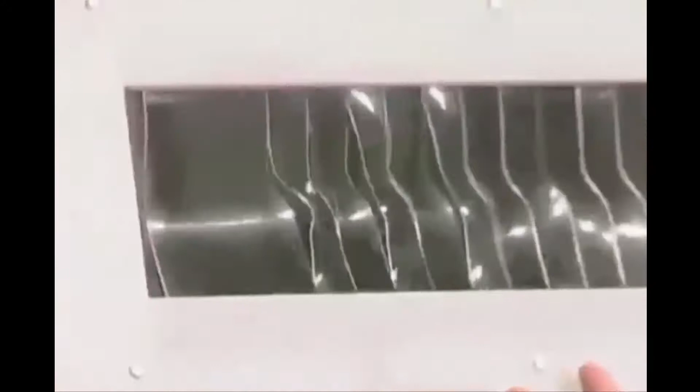We've created things like this, a glass that breathes in response to people, combining sensors and information. This is a project called Living City, commissioned by the Van Alen Institute and the Eyebeam Center for Art and Technology. We've created a facade that glows and blinks in response to things like air quality and human interest in the environment. Here we're combining environment with public space, and this is a project called Living Light in Seoul, South Korea, commissioned by the city of Seoul.

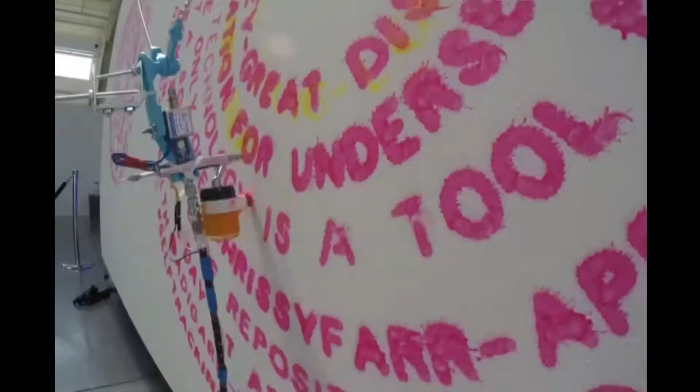We've also created a project that's a wall that displays real-time social media graffiti. Here we're combining robotics with public debate. In other words, robotics that are not just top-down automation, but robotics that have feedback systems. This is a project called Social Robot in San Francisco for an installation of the Quantified Self group. And we've even created this project here, soup bowls that reveal secret messages in street food, combining street culture and critical discourse. So this is a project called Street Life in Shenzhen, China.

More recently, we've been designing with living systems, with actual living systems, combining the digital with the biological. And this is an example where we've created an air filtering building facade with the self-sustaining ecosystem of marine plants and animals. So here we're combining building systems and aesthetics or atmosphere. This is a project called Amphibious Envelope. It's in Chicago right now as part of the current Chicago Architecture Biennial.

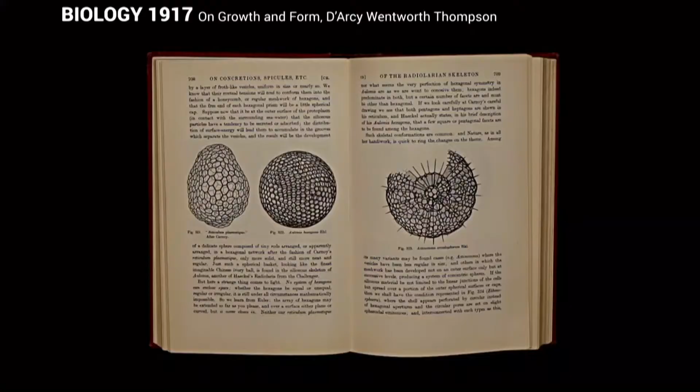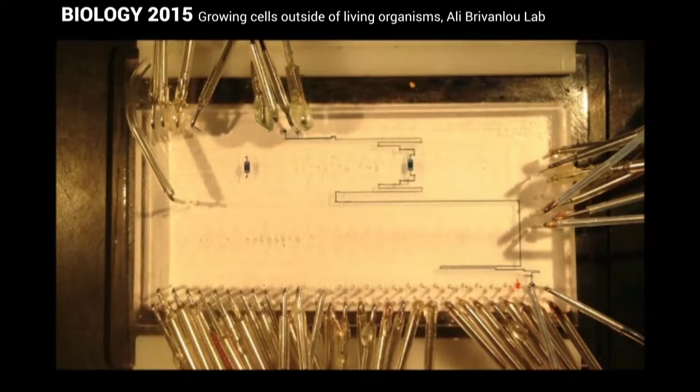In a more general sense, we've been creating projects recently that are really, I think, at the intersection of architecture, biology, and computation, combining all of them, thinking of these loops as interrelated and connected. But of course, it's important for me to note, as Oron Catts described in a slightly different way, that architects and designers have been fascinated by biology for many years. Here's a book that was written about 100 years ago that continues to be an inspiration for architects. But I'd like to say that biology of today is very different than 100 years ago.

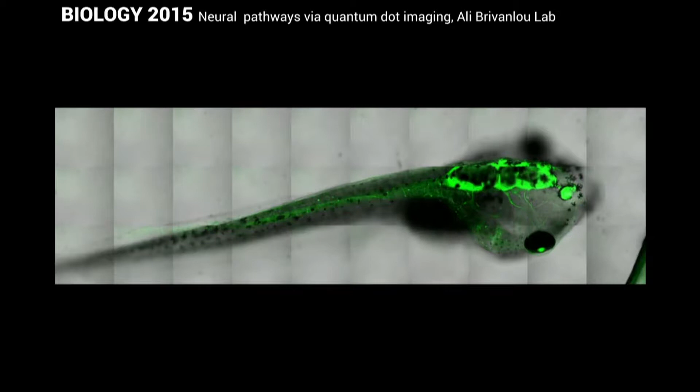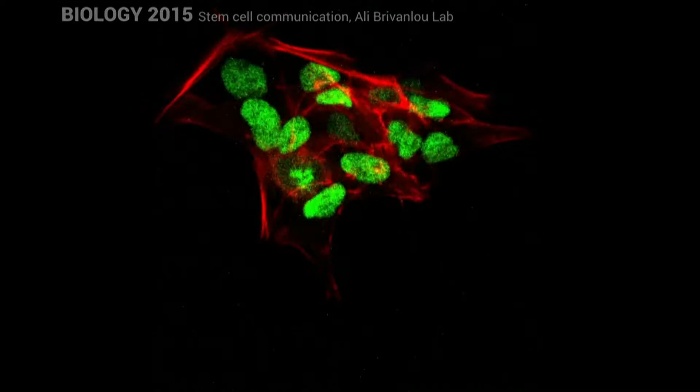It's now possible to do things like this. We can grow cells in glass chips outside of a living organism. We can do things like this through quantum dots, show the neurons firing in real time in a living tadpole. We can monitor the molecular signaling between individual stem cells in an organism that's growing and developing, and these molecular signals tell each cell whether to grow into tissue of bone or heart or muscle.

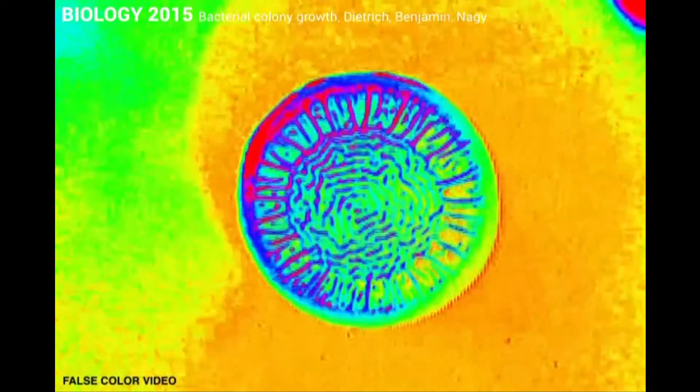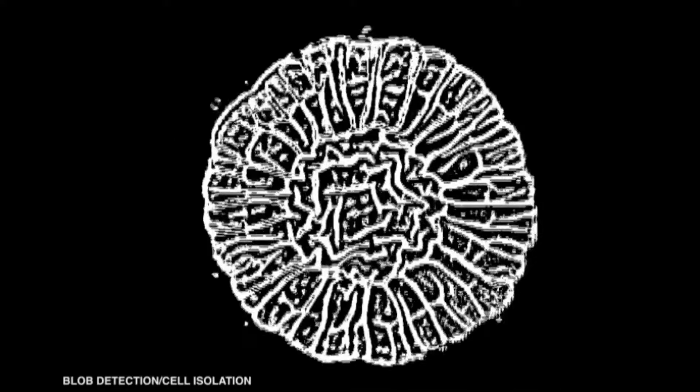And we're able to do things like this: take biology, the growth of bacteria on a petri dish about this size, and then start applying some current techniques of computation to it. So we can use computer vision, we can use machine learning to try to understand and interpret what's happening in this very complex ecosystem, or this complex metabolism of biological growth. And once we can put that complex biological growth into the computer, then it becomes very interesting to me as a potential design ingredient.

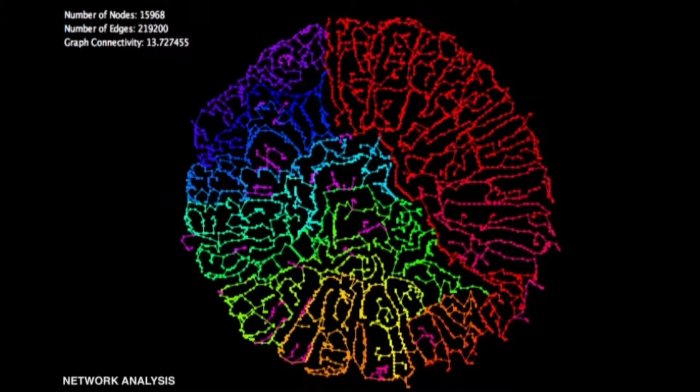In other words, I think this new version of biology right now, different than 100 years ago, offers several new possibilities. And what I'd like to do is describe 3 of those possibilities that we have been working with in our studio. Number 1, biocomputation.

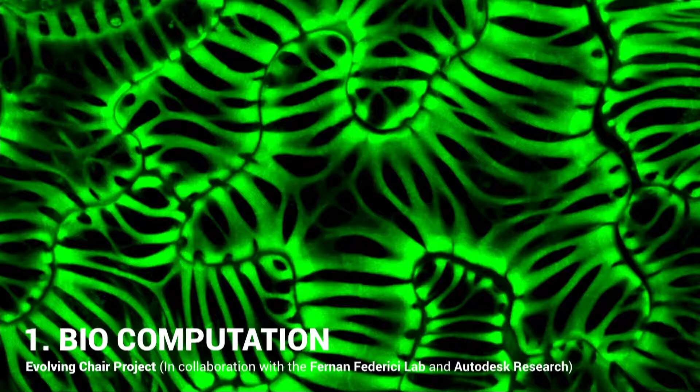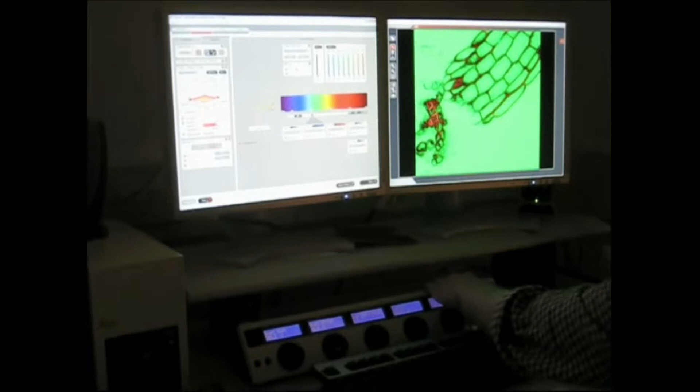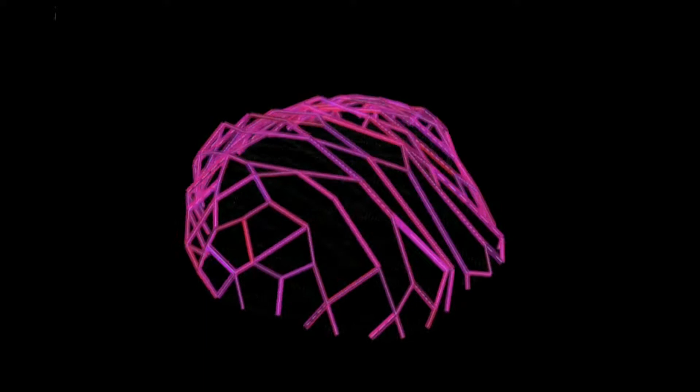This basically means collaborating with living organisms to compute solutions and explore designs beyond what is possible for a human alone to create. And in this project, we started with taking microscope photos and videos of xylem cells in the stems of plants and converting those videos and photos into 3D digital models of the growth of xylem cells so that they're in this kind of design environment.

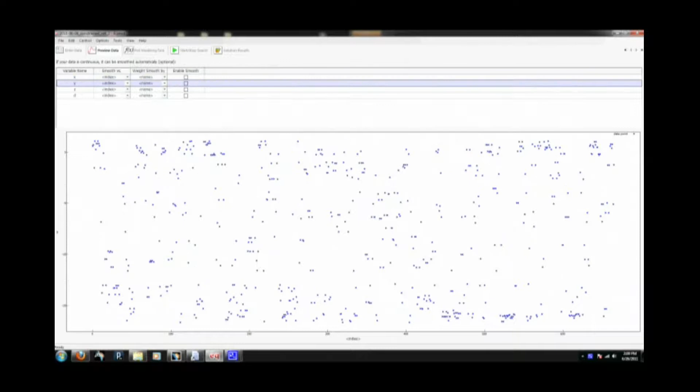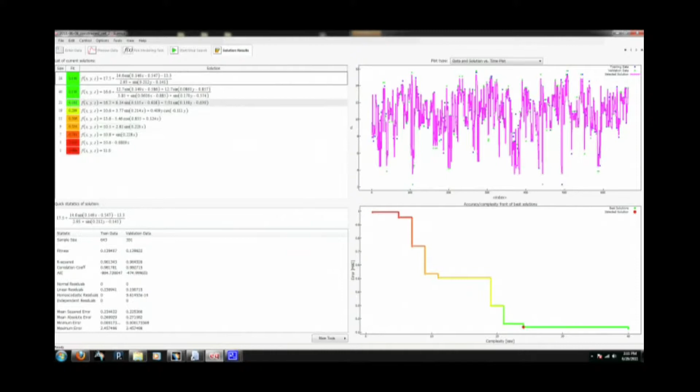And then we take a bunch of different xylem cells that create these exoskeleton shapes, and we start trying to derive data from them. So here we're measuring the length and angle of each bar in the xylem cell, feeding it into a spreadsheet, then using a kind of version of artificial intelligence, this great computer system created at Cornell University, to derive an equation from a very complex data set. So you can take almost any spreadsheet, feed it into the computer, and the computer over time will try to evolve equations that describe the data.

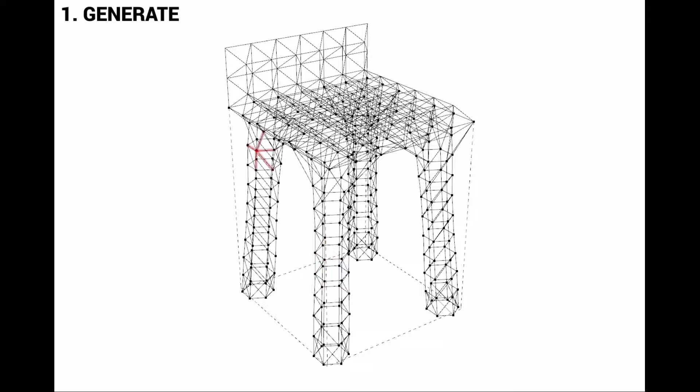But what if we could have a new approach to design where we sketched out some things, like the seat of a chair, that we knew precisely we wanted. But then we sketched out other parts of the chair, for example, the supports of a chair, that we wanted to explore and learn something new about and use a new design method for. And that was the basis for our thinking about this project, where we took the xylem cell algorithm, the biological program for how xylem cells grow, and we applied it to try to discover something new about how the support of a chair might look.

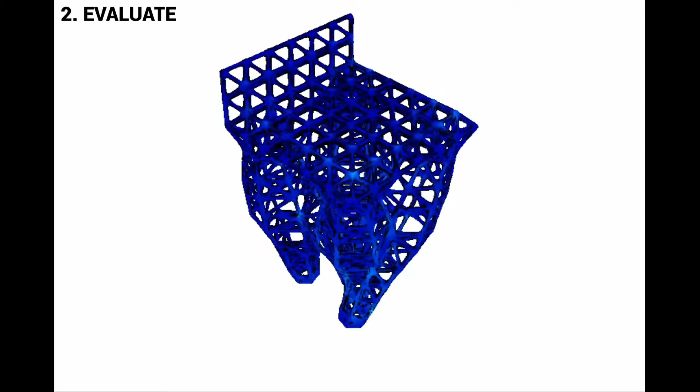So the details are not so important, but we basically populate a series of points, connect these points into a lattice, and we basically have an environment in the computer where we can design or generate many versions of a chair and then simulate their performance, for example, structural performance of a chair, and explore thousands of possible designs. Use the computer to do what it's good at, repeating tasks over and over again, and create this data set where each point represents a potential chair, and allow a human to do what they're good at, which is to interpret results, apply judgment, negotiate trade-offs between competing objectives.

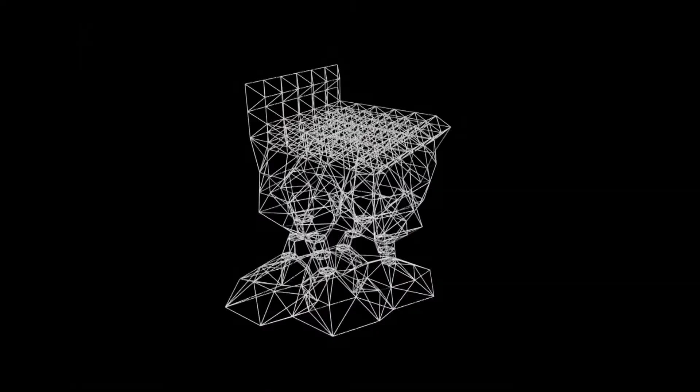And at the end of the day, we think this is a promising approach for using biocomputation to create new kinds of objects in the physical world that would not necessarily occur to us, that would not be possible to design with other methods, with previous methods.

Number 2, biosensing. So for us, this basically means using living biological organisms to detect information about the environment and then respond accordingly. This is a project that we created and that we're building right now for the city of New York. And it starts with the idea that we could create a public interface, a real-time interface to environmental quality in a very urban space right in downtown Manhattan.

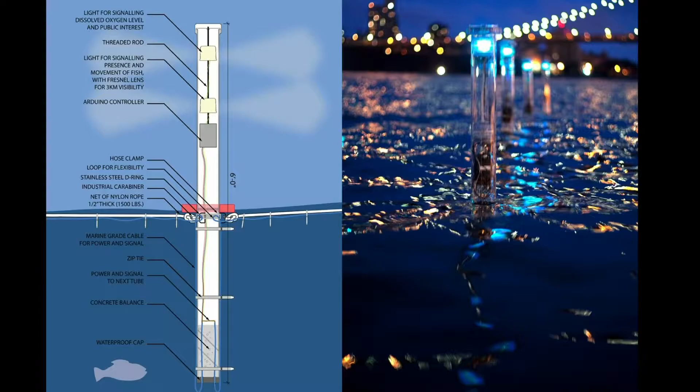And we have been using, for several years in the early prototypes, some digital technologies. You know, these kinds of physical sensors and microcontrollers that are making up what we talk about when we say the Internet of Things. And we're using this kind of technology in our public installation, but we've also started using biological sensors. And what I mean by that is that we're using mussels, living mussels, the shellfish.

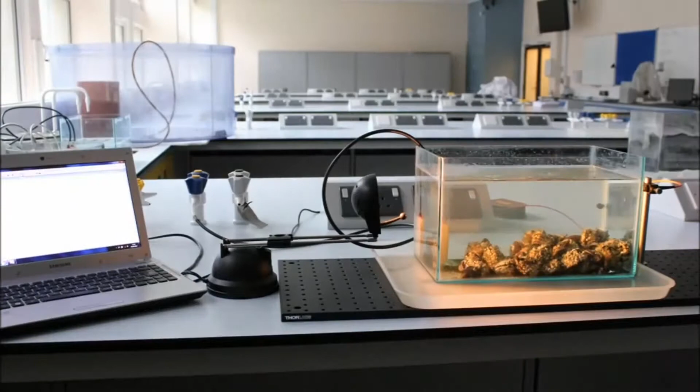And here you see how mussels, when they live, they open and close their shells as part of their process of living. So this is a sped up video, and you can see the pulsing and the moving of the mussels in this tank as they're living. Well, it turns out that the rate and the amount that mussels open and close their shells is a very sensitive and sophisticated detector of pollution in the water.

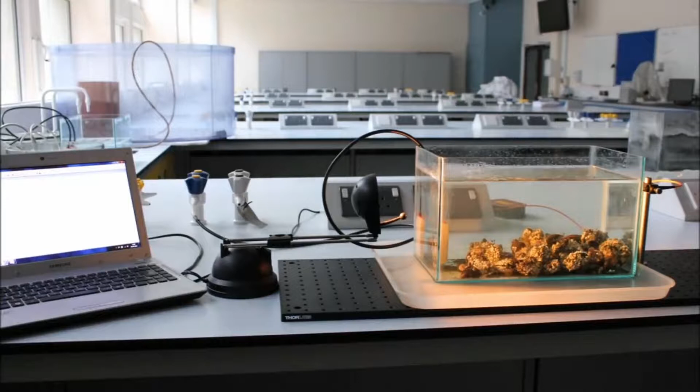In fact, when mussels open and close their shells, they tell us more about water quality than our most expensive and most sophisticated single-purpose digital sensors. They're a better sensor of water quality than a $10,000 dissolved oxygen sensor.

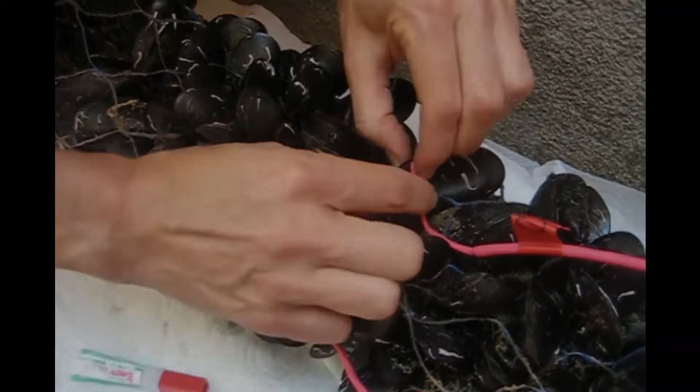And so the project that we have been doing involves taking living mussels, gluing to one side of a mussel's shell a $2 Hall effect sensor, gluing to the other side of the shell an inexpensive magnet, and then figuring out that we can harness the natural ability of these mussels to detect water quality and put that into a kind of ecosystem of design. Use that biological sensing as part of our design palette, the way we used other digital technologies or fixed inert materials.

And we think this is an interesting approach because you could say that it combines artificial intelligence with biological intelligence or natural intelligence. You know, so artificial intelligence is kind of the best computers have to offer, the holy grail of computing. But maybe we could get more out of it by combining it with a version of biological intelligence. What mussels, living mussels, have evolved to do over millions of years, detect a huge variety of chemicals and molecules in their environment and react through a combination of factors.

What we're thinking is that wouldn't this be an even better solution than either one alone? So artificial intelligence has great things to offer designers. Natural intelligence has great things to offer. And if you can combine them, that represents what we think is an explosion of new possibilities for future cities and buildings.

This project, of course, is not just about an exploration of technology, but it's out in the city. And here is a version of a prototype that we created showing how our dynamic lights, which change color to indicate relative water quality, how those lights look in the context of the skylines of our cities. So this is displaying light as information to the public as a real-time detector of water quality.

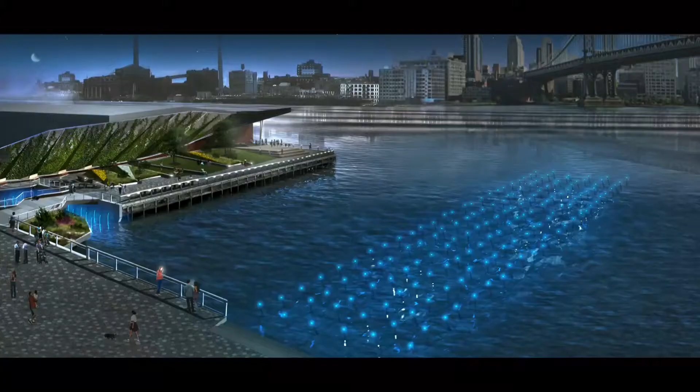And we're using this technology not just as a kind of science experiment, not just as a design experiment, but in the context of noting and designing a new kind of public space in the city. So this is a rendering of what our project will look like after it completes construction in the summer of 2016. It's a 200-foot-long floating pier of these interactive lights that will tell the public things about their environment through this combination of digital sensors and biological sensors. This is in Manhattan in the East River, right in downtown New York City.

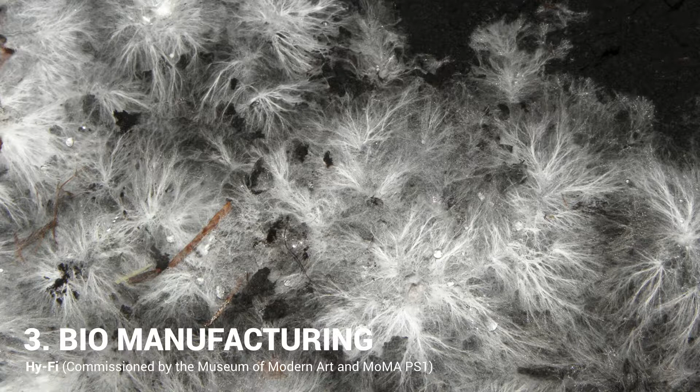And number 3, and this is my last category here, this is called biomanufacturing. And that basically is what we're defining as collaborating with living organisms as tiny factories to produce the physical stuff of the built environment, to produce building blocks or even whole physical systems for new kinds of buildings and cities.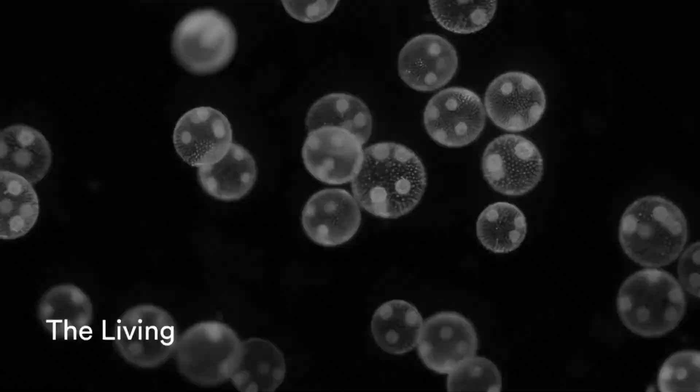This project was something we created for the Museum of Modern Art and MoMA PS1 in New York City. And it's a project that began with a competition. So this is our competition video that described the idea we had for biomanufacturing.

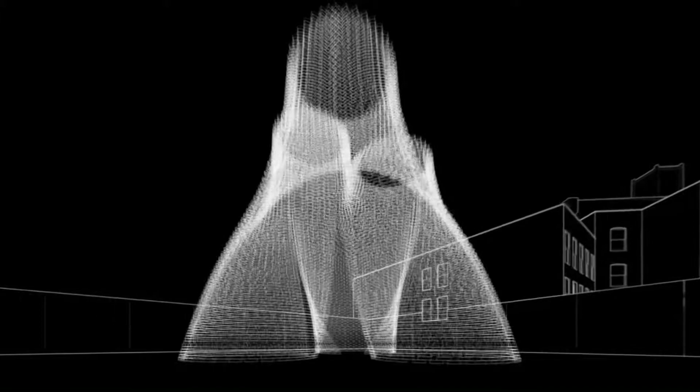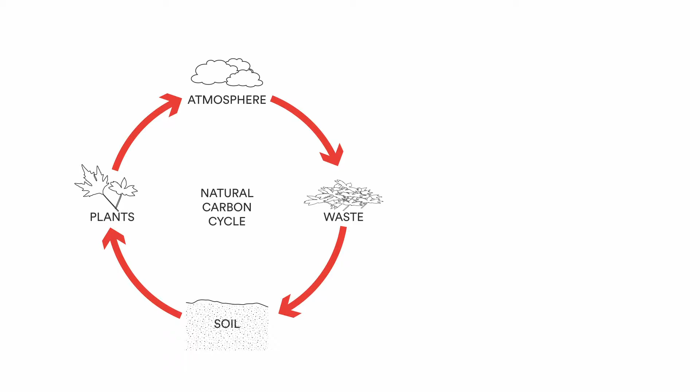So this project is called Hy-Fi, and it was basically an experiment in whether we could manufacture a new kind of building block through a new kind of metabolism. So we started with a loop of our own. I think maybe everyone will have loops in this session to show some of their ideas about metabolism.

And the loop we're showing here is the carbon cycle, the Earth's normal, natural, healthy cycle of growth and decay and regrowth. And the idea that we had for this project was that maybe we could make our buildings and our cities by temporarily borrowing material and energy from the healthy carbon cycle and then returning it back to the carbon cycle.

In other words, we were interested in thinking that maybe we could take low-value raw materials, the waste shown in the diagram, rather than high-value raw materials, spend almost no energy converting the raw materials into building blocks instead of spending a huge amount of energy to create building blocks as we do with most buildings.

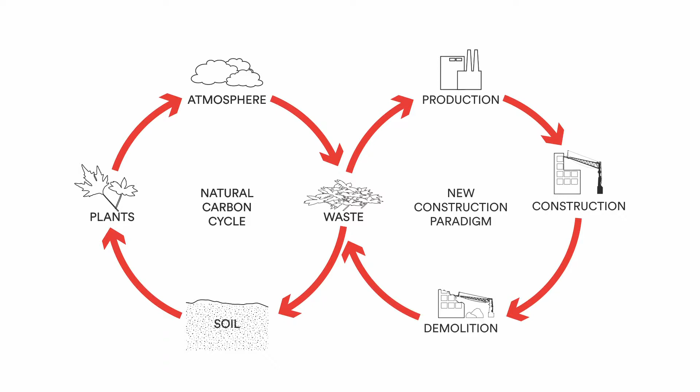Then create some kind of building, and at the end of the useful life of that building, taking all of that physical stuff and returning it back to the carbon cycle instead of leaving that physical stuff in a landfill for 100 or even 1,000 years. So how could we possibly do this? Well, of course, through a living organism.

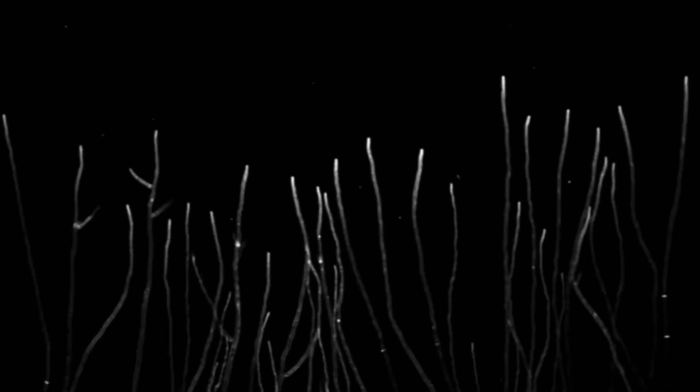This is the growth of mycelium, which is the root-like structure of mushrooms. So it grows in thin white filaments that branch in a kind of complex biological algorithm of their own. All of the nutrients that flow through these organisms are part of its growth, but also of the kind of composting of the floor of the forest where these organisms grow.

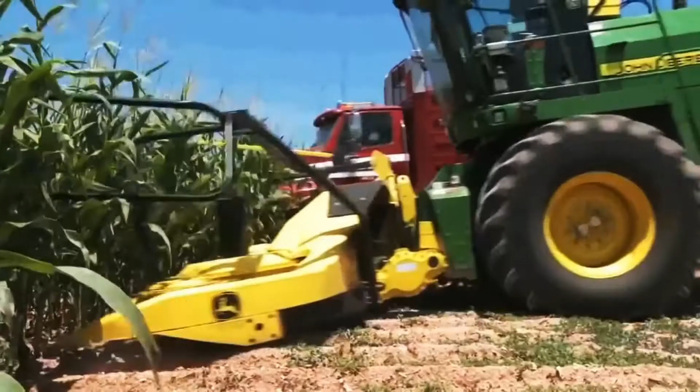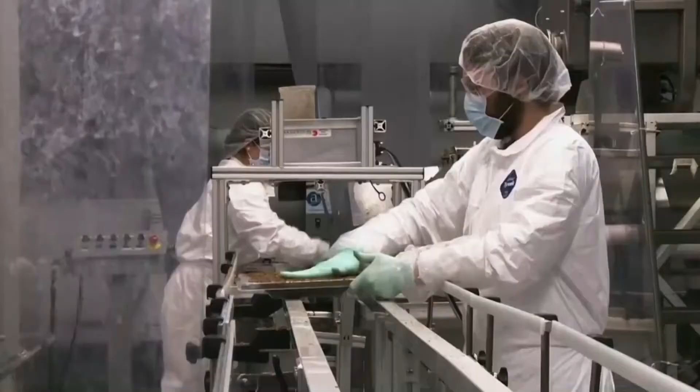And we were interested in taking this organism, mycelium, and using it to create building blocks, because it turns out that you can combine mycelium with agricultural waste, so not the high-value part of agriculture, not corn kernels, but the low-value part, the chopped-up corn stalks. You can combine those two in a mold of almost any shape, and here you see in about 5 days it will grow into a solid object.

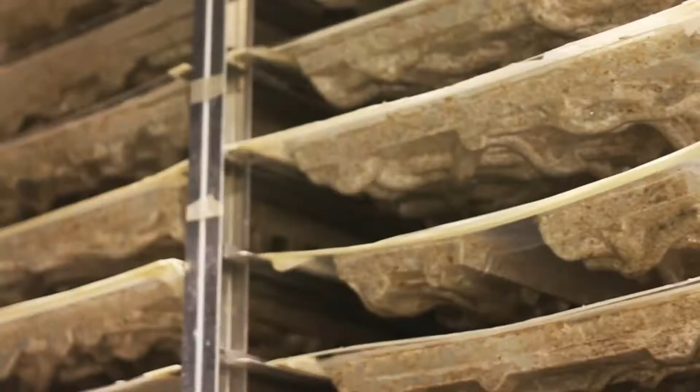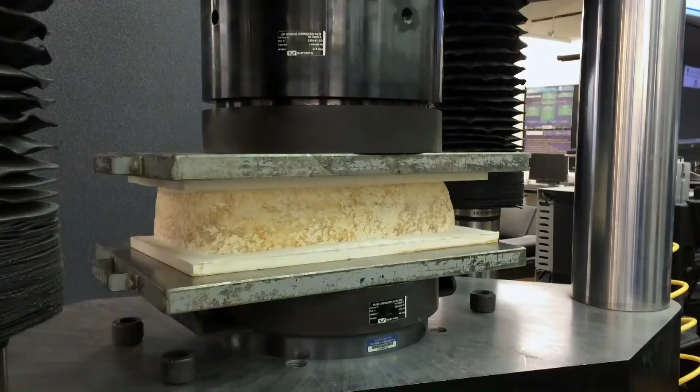So you're able to create useful physical objects out of waste plus a living, growing organism. And our idea was to create a new kind of brick, a new kind of architectural building block through this process. Here's the brick that we designed and that we ended up using for the project. But it's not quite as easy as just describing the idea and making sure that it works for one brick. And because no one had ever built a large-scale outdoor architecture out of this material, we had to do a huge amount of testing.

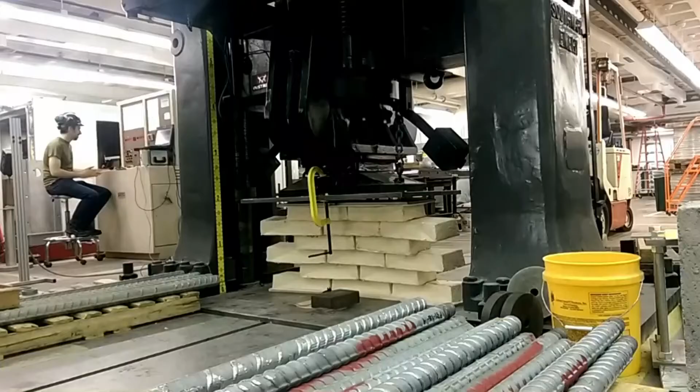So here we are taking one of these bricks, crushing it through a universal testing machine in a laboratory at Columbia University, and also testing an assembly of bricks in this testing machine in order to get information about this new kind of material. In other words, when we took a new idea and a new approach to metabolism out into the world, we had to do a huge amount of testing.

And that wasn't just to learn about the material, but because if we wanted to create a large-scale installation out of this material, we had to, of course, do some structural analysis. And our structural engineers at Arup, the global engineering firm, said the first thing we need to do is calculate how this will perform. But of course, in most structural engineering software, there's not a drop-down menu item for mushroom brick. So we had to derive the data and then input the data about how to calculate the performance of our structure.

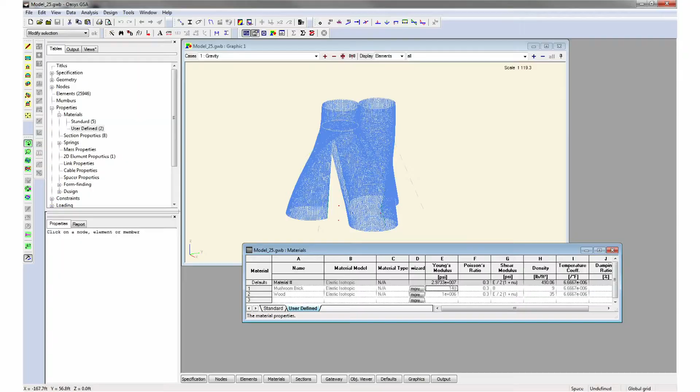Another challenge we had was that this material is different on the outside than the inside. In other words, if you cut these bricks, the inside is a little bit more porous. And this created an interesting challenge for us because unlike a traditional brick, which you could cut on site in order to make a complex form, we were not able to cut our bricks. That would have compromised their structural performance.

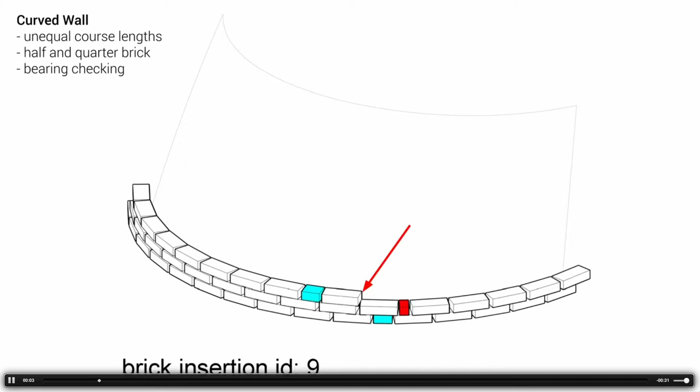So here we had to engage computation to solve two problems that are easy to describe but hard to solve. One is a fitting problem. So if each course of bricks, each line of bricks, is a different length, then you have to figure out how you can fit each course of bricks in a row.

And also, we had a stacking problem because you have to make sure that each brick always sits on top of two other bricks and is connected to make a system. And the fitting problem and the stacking problem is something that was impossible to design and understand by hand. We had to use a computer to do it.

We wrote a few different algorithms. The writing of the algorithms was iterative. The first one didn't work, but we kept working on it. And here we were applying computation not as the driving force of a design, but to solve a very specific problem in the design process.

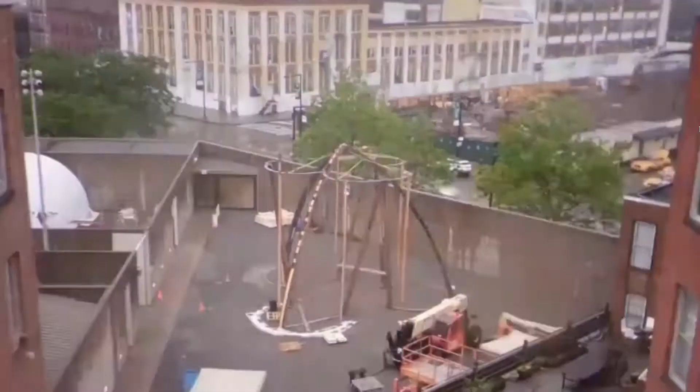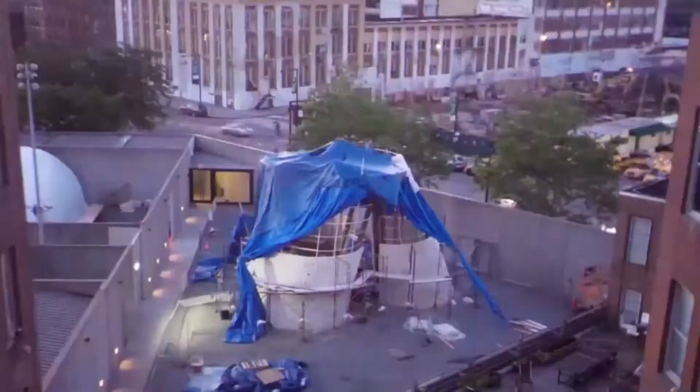This project has a very short time span. We had about 3 weeks to construct our structure, and we had solved a lot of the problems, but not all of the problems before we went into construction. And something interesting here about our ecosystem of design, or our metabolism of design, is that we had to combine

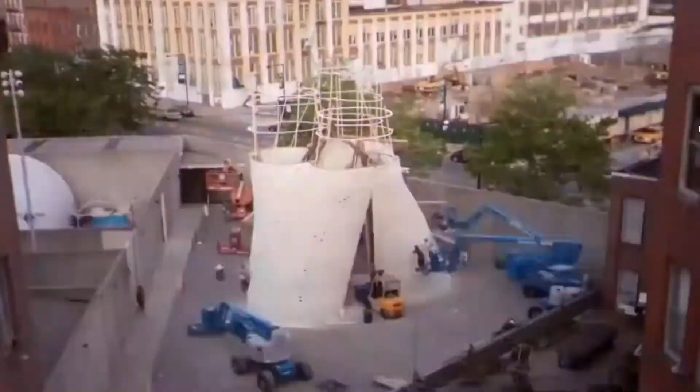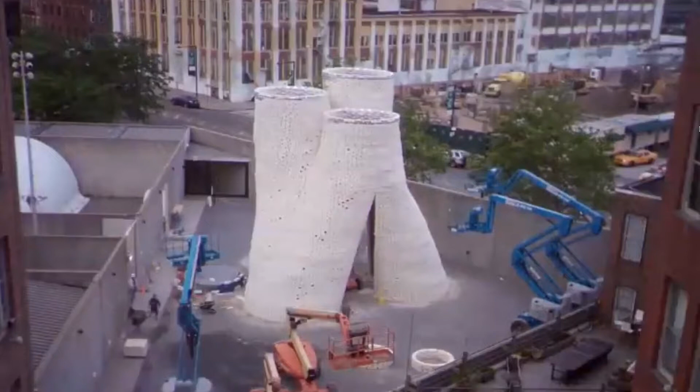different forms of knowledge. We had to combine the knowledge of Columbia University graduate students in architecture who know a lot about geometry and computers, and the knowledge of New York City brick masons who know a lot about stacking things. Neither one alone knew enough to solve all of the challenges of this new shape and this new material, but together they were able to collaborate. And maybe it's an example of the kind of heterogeneous collaborative teams that Nicholas Negroponte was describing.

Here is a photo of the completed structure. In a way, it was a test of scale. So this is a 13-meter tall structure with 10,000 bricks to test out, could we really make something like architecture out of this new material and this new metabolism. And here you see the structure in the context of the way we typically make things, in the context of the glass and steel buildings of Manhattan, and in the context of the traditional brick buildings of Queens and MoMA PS1.

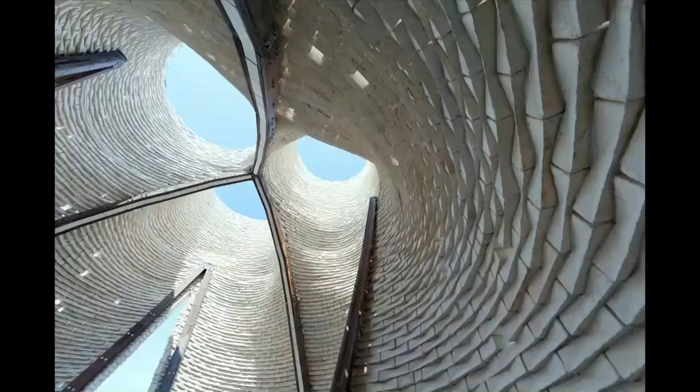The project in many ways was a test of technical things, the technical performance of building materials, but it was also, in a way, a test of aesthetics or atmosphere, a test of architectural quality. So we were very curious, what would it be like to stand inside this type of construction? What would be the qualities of light and shadow, pattern and texture? And here you see it kind of framing the natural environment, having a different appearance in the foreground and then in the background.

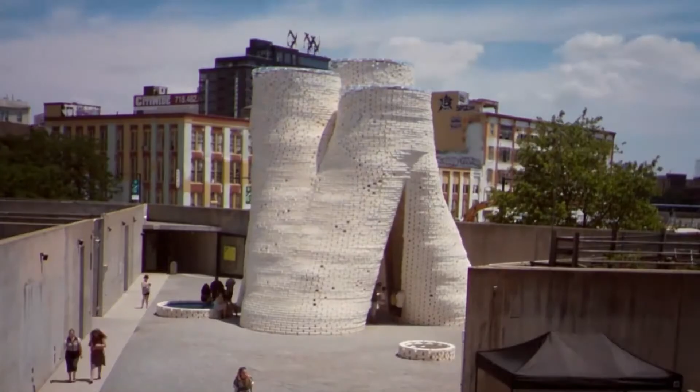But of course, anyone who's been to MoMA PS1 for an installation like this knows the ultimate test for this kind of project is its ability to host a party. And here was the thrilling but also terrifying moment when 5,000 people come into the courtyard of MoMA PS1 to hear experimental electronic music, and they're climbing on our structure and going inside our structure and pulling at our structure.

But that was entirely fitting for us because in the end, in the way that we think of architecture as being part of an ecosystem, we wanted to test this project out in culture, in society, not simply on a lab bench, not simply in a vacant lot the way some architectural facade mock-ups are done, but out in culture, out in society, out in the context of some people who have very different thoughts about the experience and the construction. Of course, the project also was engaged through a kind of conversation in social media.

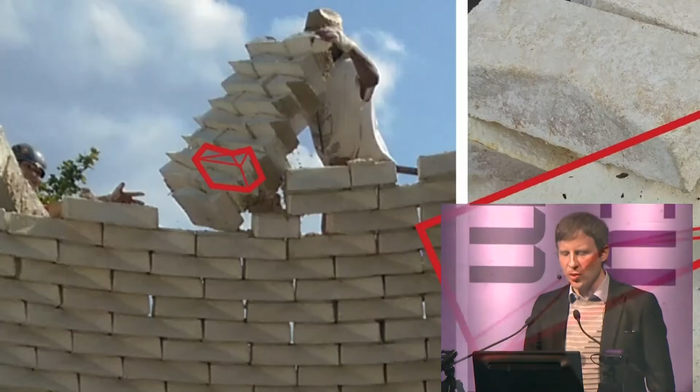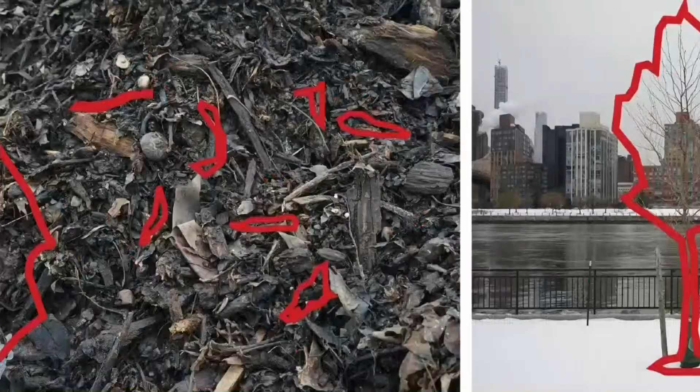But really the ultimate test of the project, the original idea of the project, was whether we could take this physical stuff, whether we could deconstruct the building after the end of the summer, break up the bricks into small pieces, combine those small pieces with soil and food scraps and bacteria in a composting facility, and then return all of that physical stuff to soil that in turn could grow new plants or new crops. And we returned all of this soil. We took all of the 10,000 bricks, composted them, returned this soil to tree planting in New York City and local community gardens.

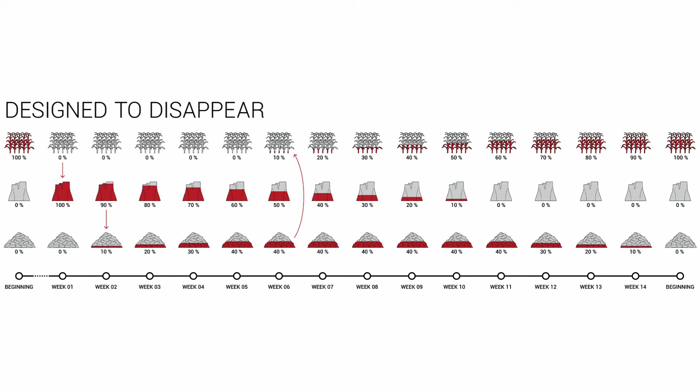And if anything, the big idea of the project is that we might think about the built environment and the buildings and cities of the future in terms of designing them to disappear just as much as we design them to appear. In other words, designing them to return back to some kind of metabolism or cycle.